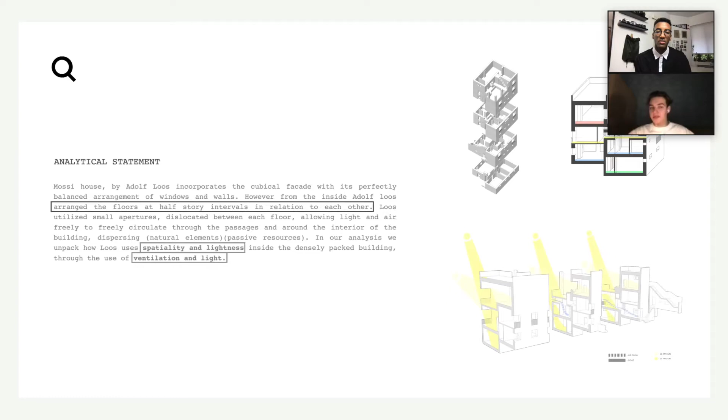Loos utilized small apertures dislocated between each floor to allow light and air to freely circulate through the passages and around the interior of the building, thus dispersing natural elements such as light and air. In our analysis, we unpack how Loos uses spatiality and lightness inside the densely packed building through the use of ventilation and light.

So when you look at some of the references that we found in the original documents, the floor plan, even with the short section, shows how those shifted floor planes create this hierarchy.

I think, Artem, we saw some things about the basement being dedicated to the workers and the homeowners primarily living at the top. So you can see that shift in the number of floors, like A, B, C, D, all being shown in this shift in floors.

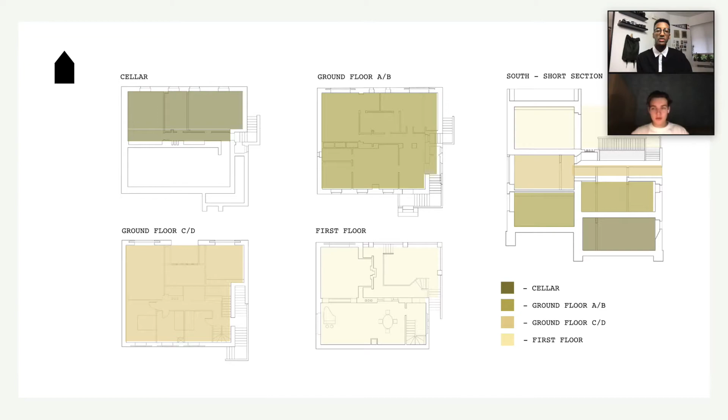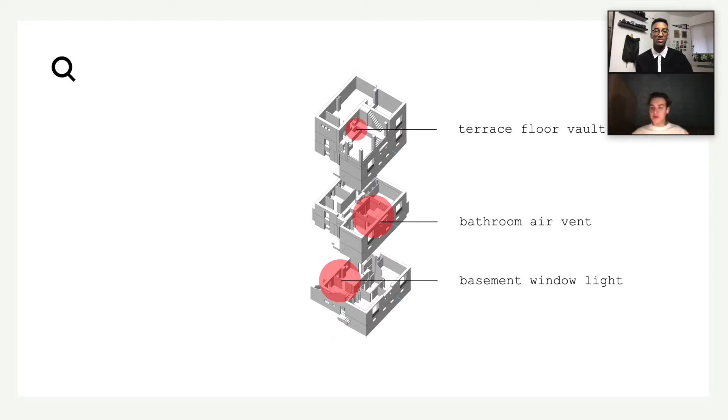With that in mind, we jumped straight into analyzing a specific element, which was light and ventilation, and these were our three points. We want to explore the terrace floor vault, the bathroom air vent, and the basement window light as our three key points to explore both light and natural ventilation.

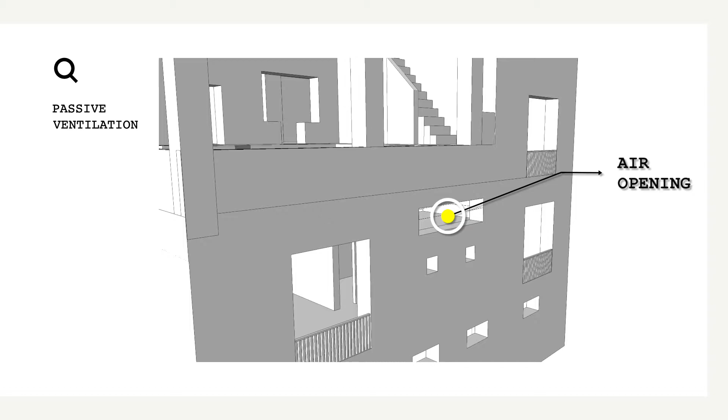By splitting the house in two parts, we can actually explore the ventilation seen in one of the openings of the facade. You can see the opening near two large windows on the east elevation of the house, which actually isn't a window. It doesn't have glass in it, and its pure function is to let the air flow inside of the house, and thus introduce the concept of passive ventilation in the house.

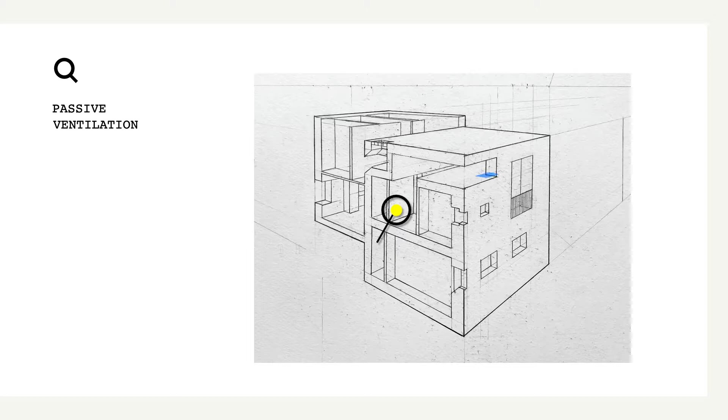So what we can see here is the airflow traveling inside the bathroom over one of the bedrooms and actually dispersing through the hallways in the bathroom. If you slice the house, you can see other airflows entering and exiting from the first floor, thus creating the airflow throughout the house.

But you cannot talk about ventilation on its own without the scene of light in the Mediterranean. Yes. Light for Loos dictated the design language of the house and of the facade, especially the sunset of Venice, and why the terrace was situated on the eastern side of the roof, and why in his floor plans he had the main living room on the top floor instead of the bottom, which you would naturally see in other houses.

Yeah, absolutely. I think light is a critical element. It does dictate the room temperature of a house. And in this case, Adolf Loos is really showing that with his control of the window apertures, he's able to allow certain areas to be lit with light and have exposure. In other ways, it's also shadowing and creating cool spaces that create that ventilation.

It's also important to distinguish between the light in the winter climate and the summer climate. In winter, the sun is actually lower, and in summer, the light is actually higher. The angle is more steep. Therefore, Loos uses the arrangement of windows in the facade to differentiate.

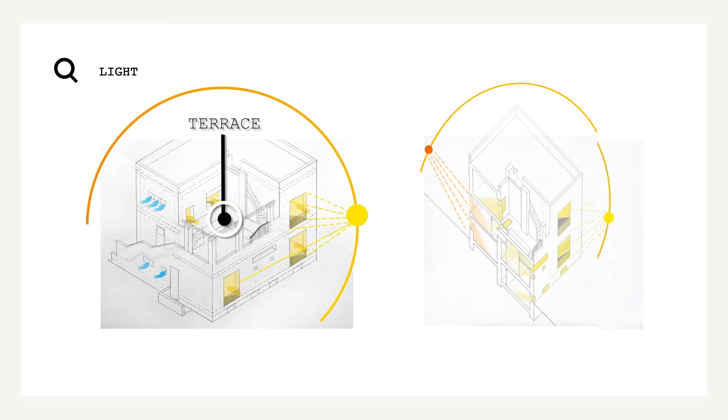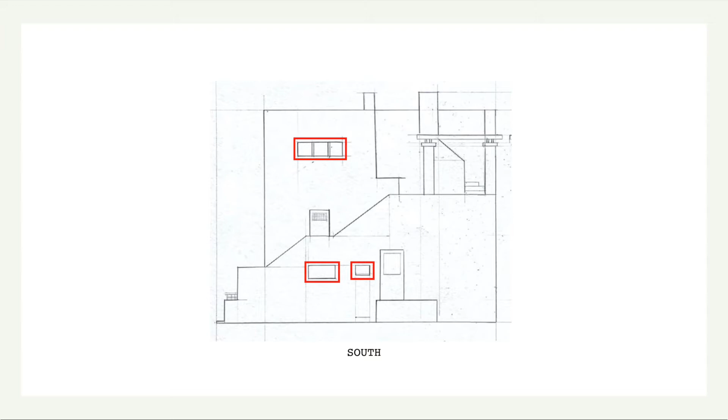the terrace is dislocated in the southeastern corner in front of the lagoon to take the rising sun. To the south, where the rays are warmer, the openings have minimal dimensions. They are wider on the eastern and western sides in order to follow the solar cycle of the sunset.

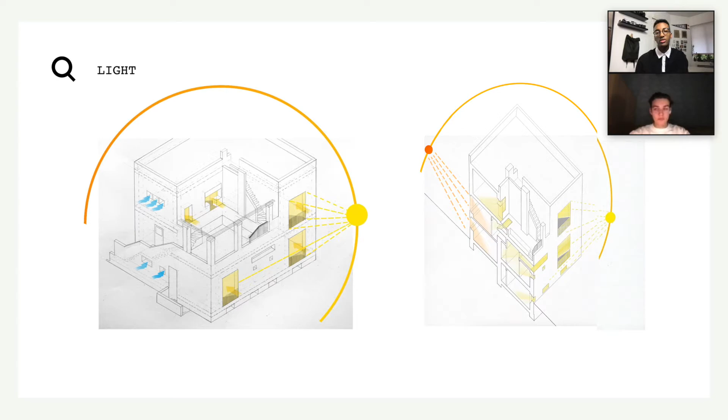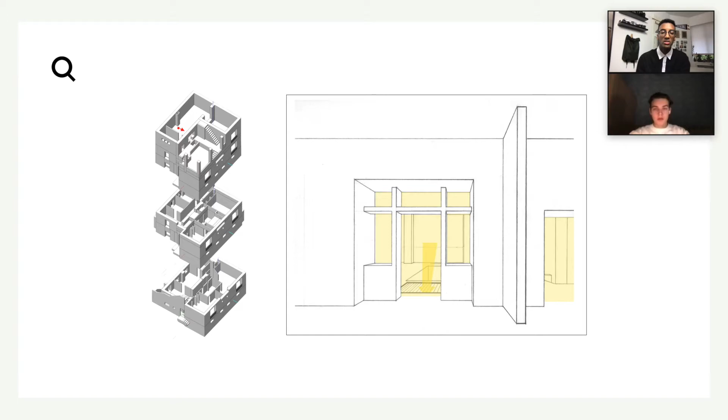Yeah, absolutely. And another really interesting thing that we noticed is the view. From an interior perspective, you can see what it would look like looking outside into the terrace, and you notice that there's this little floor light vault. This is probably the most ingenious aspect that Adolf Loos introduces in the design.

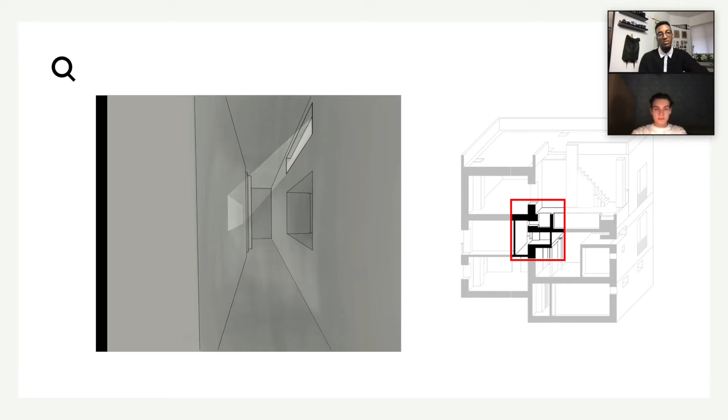This floor vault allows for light to really bleed into the lower level corridor, allowing light to enter into that space and illuminate it more. And it's incredible to see how he's using that floor vault to naturally light an interior space. Another one is also on the first floor, seeing how the big windows allow for natural light to enter into a semi-secluded interior space in the lower level.

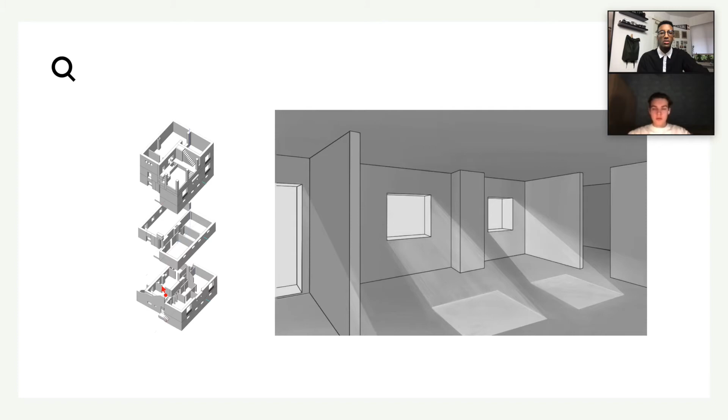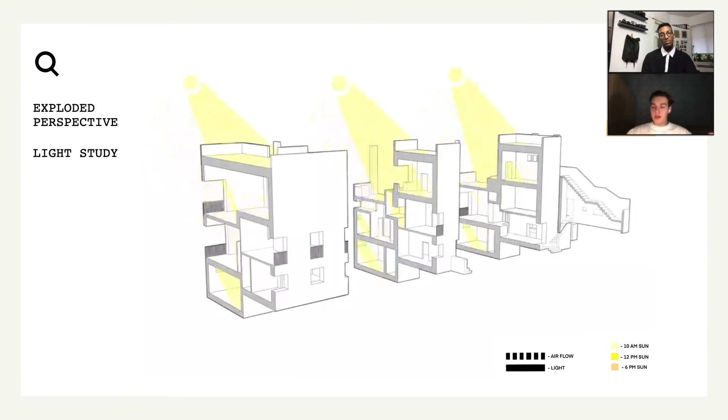We can see here we use the animation of the sun to approximate how different windows will allow light in during every time of the day. And you can see that during the morning, the big windows are more lit up by the sun because of the lower angle, thus allowing the maximum light in the day.

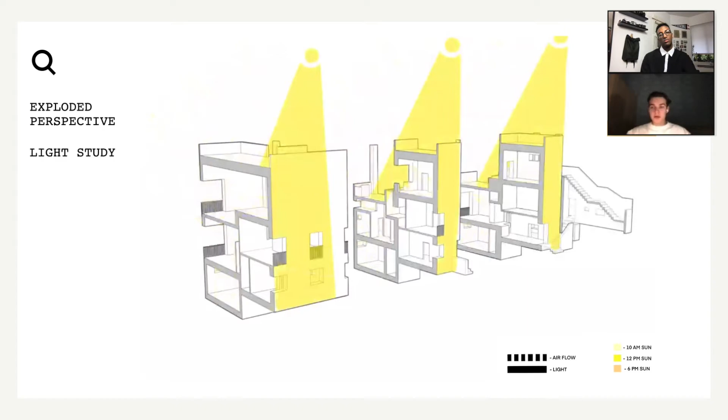And in the afternoon, for example, 12 o'clock, the sun's arrangement in the sky creates shading in the big spaces and big living rooms, creating this cooler interior, while the smaller apertures in the basement allow for less light for the working area. Maybe if it's a cellar, there is storage there. The architect didn't want to actually heat the cellar that much, but create a more cool environment.

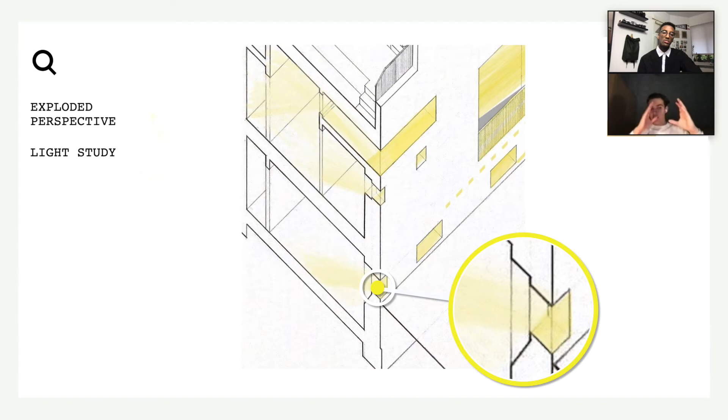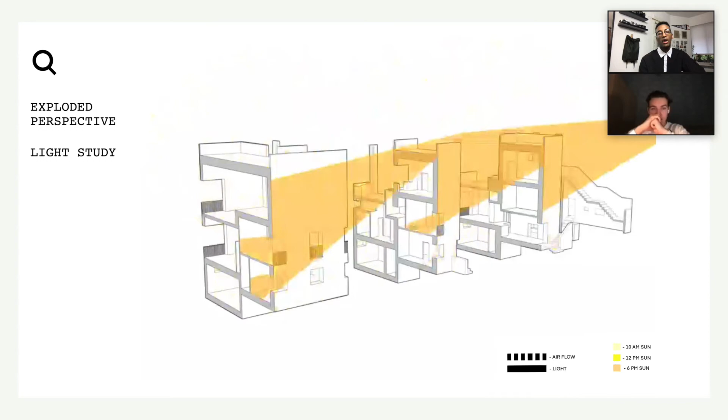So we can see the smaller slits and smaller apertures to allow less light, but at the same time, because it's located at the bottom of the facade, it's actually angled a little bit, so more light can travel in on the steeper angle than the bigger windows where the light rays would come directly. Yeah, I think this demonstrates a very specific way of how he's composing the windows for different times of the day.

So I think, with all things considered, we've talked about the passive air ventilation and light, and his ingenious use of the floor vaults for allowing light to peek through the centralized hidden corridors. We can sort of see how he's using techniques. It's a very complicated house with the shifted floor planes, but he's using specific techniques that are, I would say, ahead of its time.

When you think about efficiency for a house, especially with its location being in a warm climate, you really do have to rely on passive ventilation when it's a time period where ACs didn't exist. It's really important. Yeah. I think he was onto something in a very sustainable and efficient manner as well.

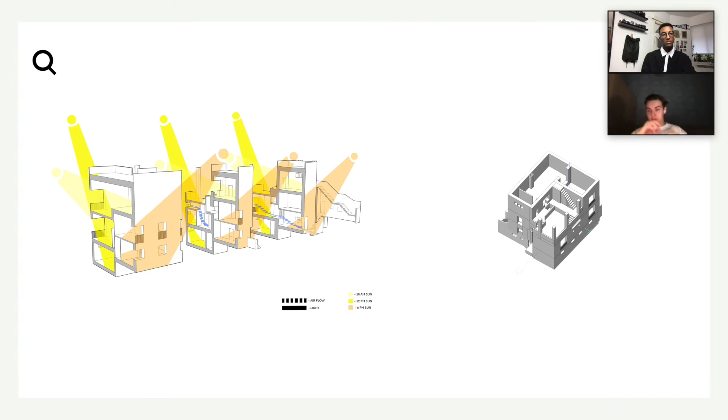It's amazing that his design language is dictated through the site and through the climate where he's situated. The physicality of the house is dictated through the study of the light and the climate and the study of the airflow, allowing the air to travel throughout the house. If it was on the same levels, the air would be trapped on each floor.

Yeah, very site specific. And honestly, it's really sad that it wasn't constructed. That's the other thing. Yeah. He spent so much time thinking about all these intricate details, but it was never constructed. But I think due to structural problems. Yeah, due to structural problems, which is really sad.

But it's been really interesting diving deep into investigating the plans and seeing some of the models, and really intricately breaking down the design has really shown us a lot.